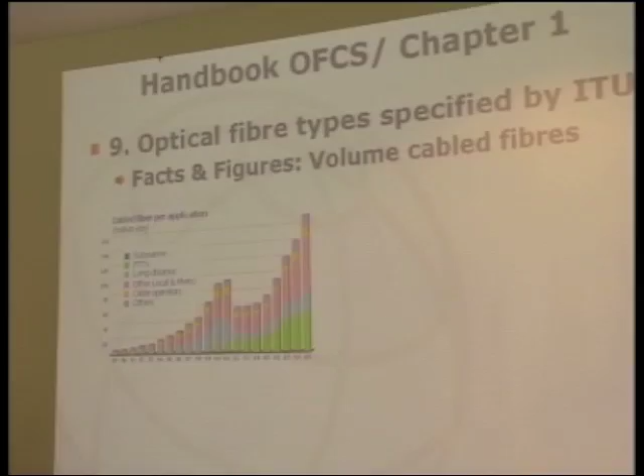You see also the different applications. Certainly important since 2001 is the growing impact of fiber to the home application, shown here as the green part. This section is growing very fast, particularly in Europe, America, and Asia. The long distance market is still about stable, while local, regional and metro is still growing, as you can see from this section.

Since optical fiber communication started, we have already installed more than 1.2 billion fiber kilometers. It's since the 19... I'm sorry. And we see also that the fiber to the home market is growing very, very rapidly. That's an important picture.

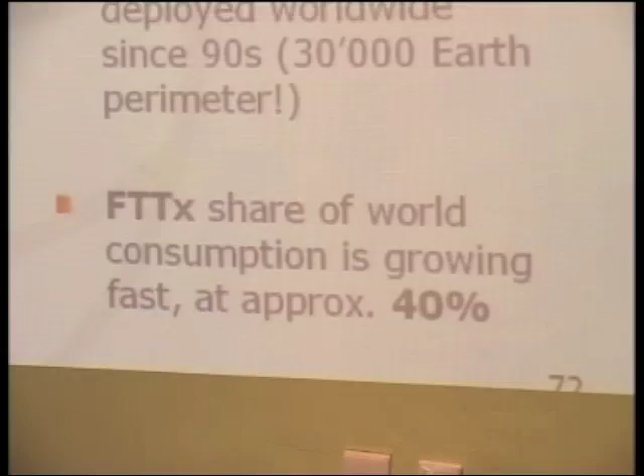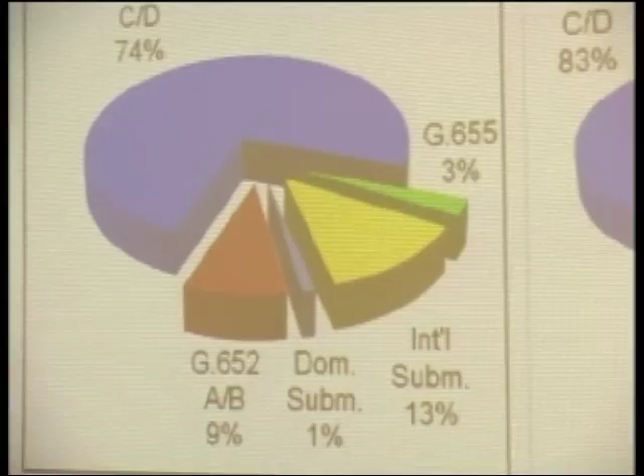Another picture that may be interesting for you concerns the choice of which kind of fibers. I show you here present data and foreseen data for 2015. You see that the G652 CD version is still the main installed fiber worldwide, with the AB fiber being the older type. The G655 fibers are a rather limited portion, because these are only for long distance, and you see that G652 fibers have been installed widely also for long distance applications. So again, it's not a black and white story about which fiber should be used for which application. It's clear that G655 will be used for long distance, that's clear.

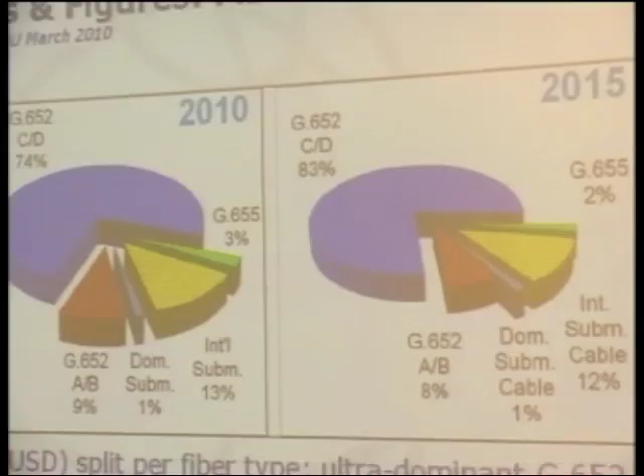With this picture, I hope to have given you an introduction into chapter 1 on optical fibers, and some clarifications of all the important parameters associated with optical fibers, and the different fiber types in our ITU catalog. I agree it's not an easy task to choose between the different fiber types available. It's a balancing act, not a black and white picture, and it certainly needs input from system manufacturers on what they think is the best optimization for a certain link.

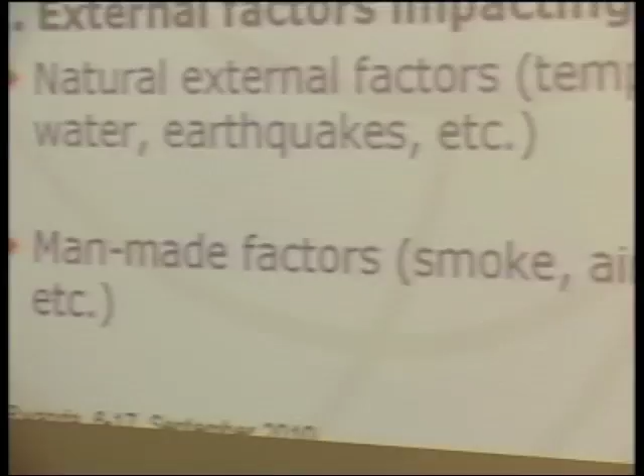We can also look at man-made factors impacting cables, like smoke, air pollution, fire, etc. In table 2.1 of your handbook, you see an overview of natural external factors impacting external and internal cables.

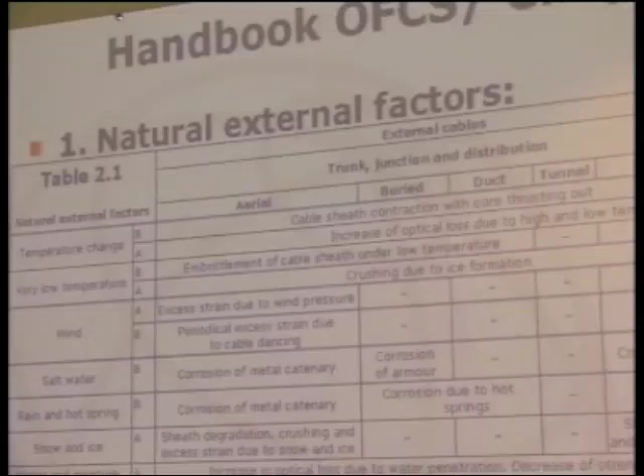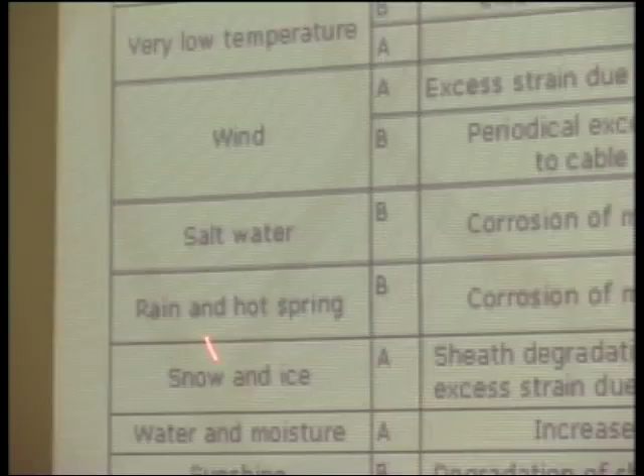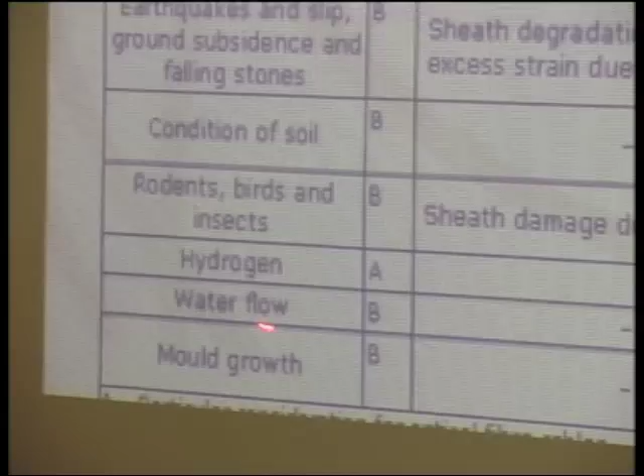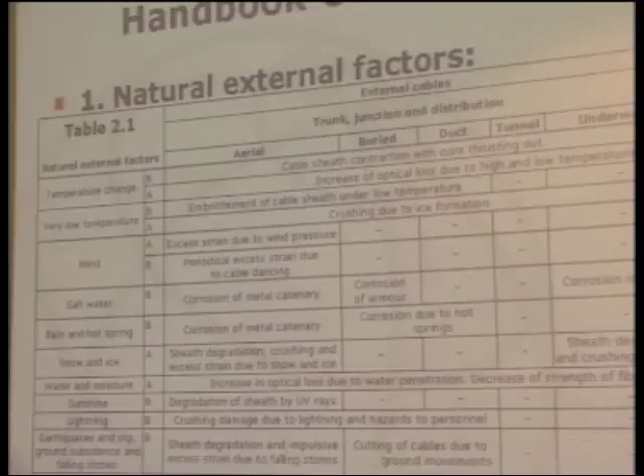This is a section of a series of different factors, some of which we'll highlight later. You see temperature change, very low temperatures for Nordic countries, wind, salt water, rain, hot spring, snow and ice, water and moisture, sunshine, lightning, earthquakes, soil conditioning, rodents, birds, insects, hydrogen, water flow, and mold growth. This is a list of typical impacts on a cable, with subcategories of aerial cables, buried cables, duct cables, tunnel cables, underwater cables, plus a separate category for internal cables—customer premises or central office cables.

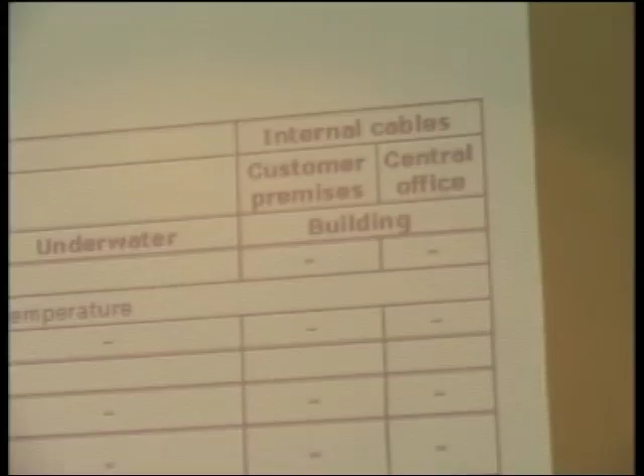I'm not going to highlight all the different aspects—you can see them in your book and look at what's possible. I'll just go over some of them.

For instance, temperature change could influence the cable sheath contraction and increase optical loss due to high and low temperatures. This is a clear aspect.

We can also look at earthquakes and ground subsidence. In that case, the sheath could be degraded, and impulse or excess strain could be added to the cable. So you see a whole variety of impacts that can act on the cable.

In table 2.2, we see a similar overview with the same structure of external and internal cables, but now showing man-made factors. For instance, factory smoke and air pollution, traffic, voltage that could connect to the cable, DC current, petroleum gas leakage, fire, even nuclear radiation, hydrogen, and installation practices. These are not natural causes, but man-made causes impacting the cable.

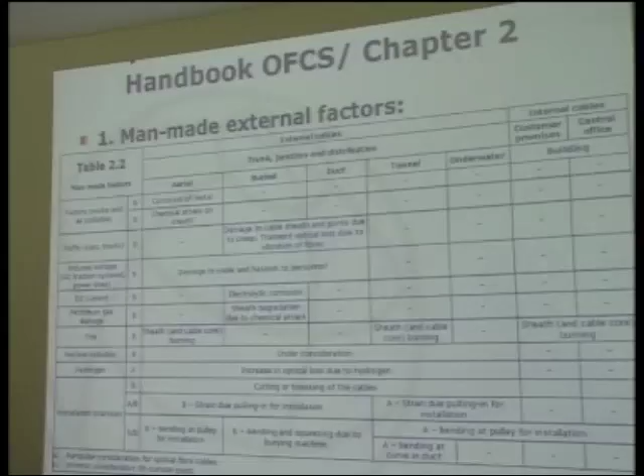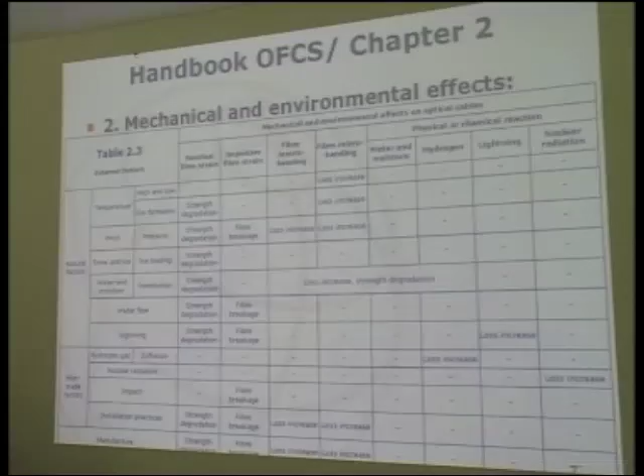In table 2.3, you see a more detailed overview of how these natural and man-made factors impact the fiber itself. For instance, some of these impacts work through residual fiber strain, which causes strength degradation of the fiber inside the cable. These effects in table 2.3 impact not only the cable but the fiber inside it—for example, temperature can influence microbending and cause a loss increase.

Let's look at others. For instance, if hydrogen is created in your cable, it can be seen as an increase of attenuation in the fiber. Also, issues like fiber strain impact fiber breakage. So this gives an overview of all the different causes which may act on the fiber and the cable, and you should take care of that.

Let's walk through them. First, residual fiber strain, caused by tension, torsion, or bending, may shorten the lifetime of the fiber because of increased crack growth.

In general, optical glass fibers behave elastically up to a few percent elongation before they break. The strength of the fiber is mainly governed by weak flaws already present from production level, which are always present to a certain percentage. Fiber stress weakens the strength, especially when combined with a moisture environment—moisture can cause weak flaws to grow and reduce fiber strength over time.

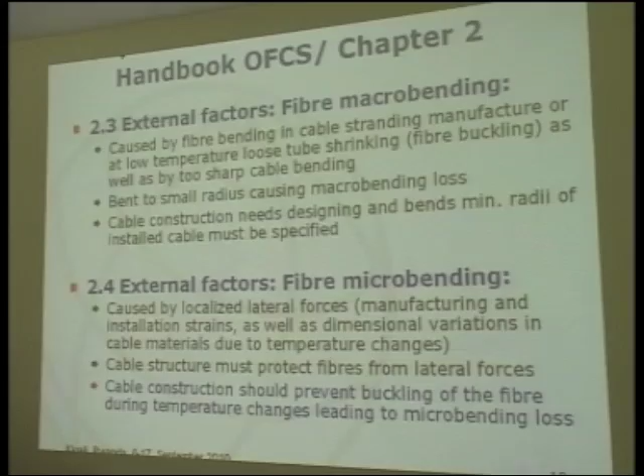If there are no questions so far, another external impact is water and moisture. Moisture may permeate through diffusion, and in case of inadequate cable construction or sheath damage, water may penetrate longitudinally within the cable core. So that is a damage which may happen.

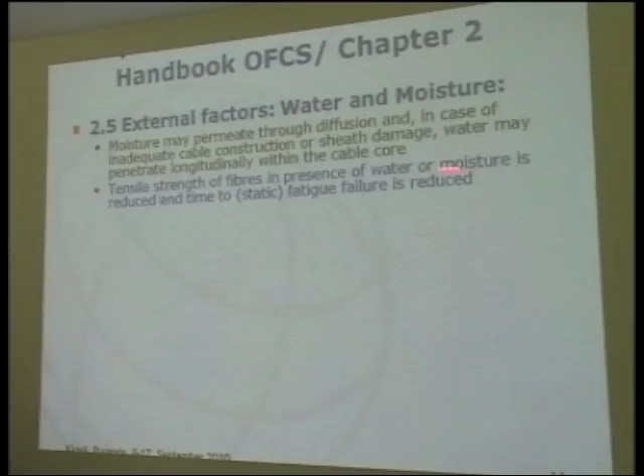If fibers are under tensile strength, and if they are in contact then with water or moisture, there's a very good chance that these weak flaws which are in the glass will weaken further and grow, and because of that, failure may happen at a certain time.

Now, optical loss may also increase with some cable constructions incorporating metallic elements if there is a generation of hydrogen when water is present in the cable construction. So hydrogen gas will introduce additional losses. We will have a look on that later.

Optical fiber should be isolated from water and moisture, particularly in the presence of excessive fiber strain, which is a conclusion from the above. Moisture permeation is minimized by longitudinal overlapped and bonded metal foil and the use of water blocking materials. This way, we can avoid water acting into the cable core where we have the fibers.

As an alternative, it's also possible to make a kind of metal tube with the fiber inside, which is a seamless metallic barrier that can be completely effective in preventing permeation. During production, a foil is formed around the fiber and welded over the entire length, giving a completely hermetic sealing of the fiber inside that metal tube. Of course, you have to take care that you don't have material inside that tube generating hydrogen, because that hydrogen is kept completely inside this metal tube. That should be avoided, of course.

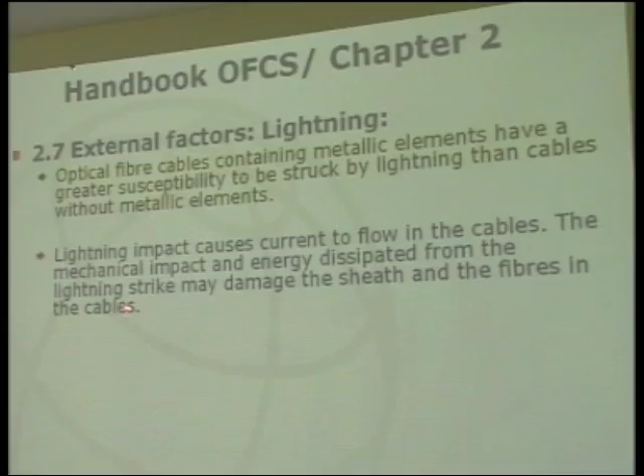Lightning impact causes a current to flow in the cables. The mechanical impact and the energy dissipated from the lightning strike may damage the sheath and also the fibers inside the cable. So there is a real danger in that case.

To prevent or minimize lightning damage, construction may be considered of non-metallic cables, because then the sensitivity of such a cable is lower. High current carrying sheaths are also a possibility to take care of this, or alternatively, some methods proposed in ITU recommendation K25. I have not looked into this recommendation, but you can look for it and download it from the website. So these are some issues around the possibility of lightning in your cable.

Nuclear radiation, that is maybe an issue which is not happening so often. Optical fiber cables may be exposed to nuclear radiation, causing optical loss increasing to an unacceptable level. We call this loss radiation-induced attenuation.

Normally, we see this effect in particular for cables inside nuclear environments, like nuclear power plants. If we have a cable inside a plant and radiation is present, that radiation may give a certain damage to the glass, because of which the attenuation of the glass will increase.

Considerations on the cable are still under study, so we will not see this effect so often in normal applications. For those applications where cables are necessary in a nuclear environment, such as nuclear power plants, special fibers have been developed and are available. These fibers are not specified in ITU, but several fiber makers make them available.

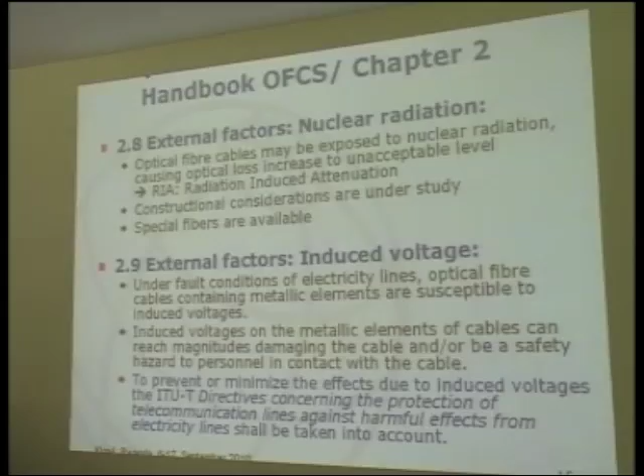To prevent or minimize the effect due to induced voltages, there is a directive from ITU concerning the protection of telecommunication lines against harmful effects from electricity lines, and that should be taken into account.

Another external factor could be biological attacks on the cable. The outside of a cable can be damaged from biological attacks, for instance by mammals, squirrels, mice, rats, moles, and other rodents. I think that is well known. Also birds like the woodpecker, cockatoos, insects like termites, ants, beetles, wasps, and also microorganisms like bacteria, fungus, and molds could attack the cable sheaths.

When it is not possible to avoid the optical cable being exposed, one could eliminate this hindrance using chemicals or poisons. However, we should be careful that in this case, these chemicals and poisons are useful sometimes, but they can be a danger for human beings and also cause environmental pollution. So there is a certain limitation in using this kind of countermeasure.

Some chemicals are useful as a deterrent, to get rid of the attacker, not as a poison, but just to frighten them off. Some chemicals are sprayed on the cable structure, on the surface, and they leave a special smell as a deterrent.

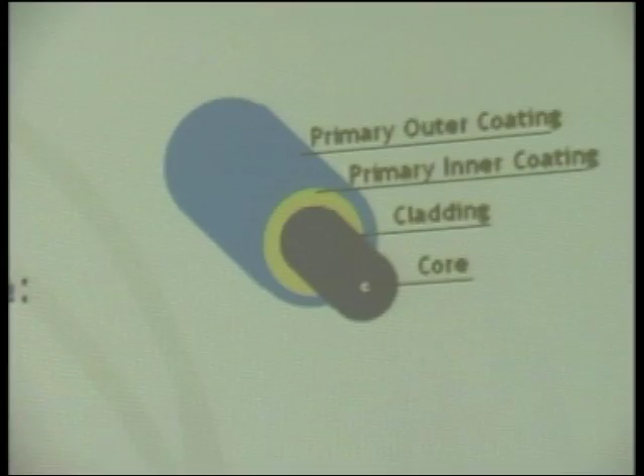Now the optical fiber itself—we have seen already the base form of a fiber is a primary coated optical fiber. I've indicated here the cladding in dark blue, and here the core inside, the single mode core. Then you see two layers around the glass: a primary inner layer coating and a primary outer layer. So in fiber production we add two layers of coating, indicated as inner and outer layer.

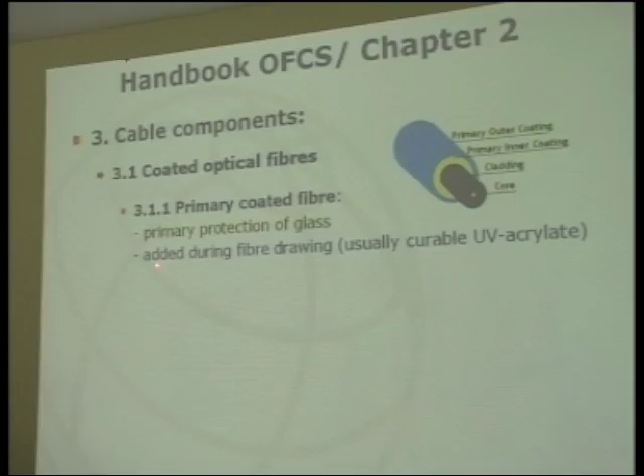First of all, the goal of a primary coated fiber is to provide protection to the glass—that is the main importance of a coating. It's added during fiber drawing, as I explained yesterday. Usually it is a curable UV acrylate. In some cases we can also use other materials, for instance if high temperature coatings are needed, but normally for telecommunication use, UV acrylates are used as coating material.

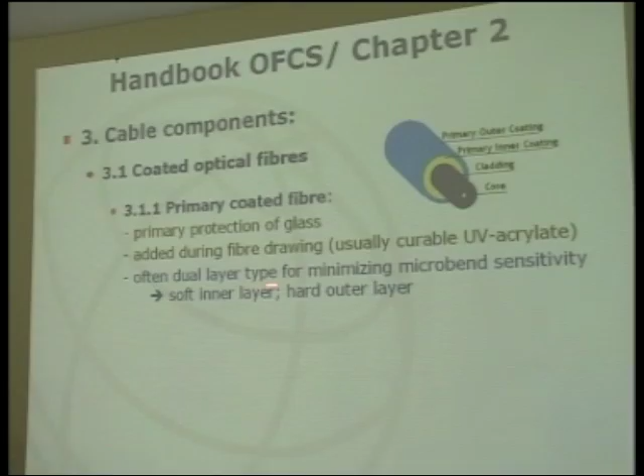As I explained yesterday, we often use dual layer types to minimize microbending sensitivity, which means in general that we have a soft inner layer directly in contact with the glass of the fiber, and a hard outer layer to protect the whole assembly from the cruel outside world, so to say.

It's specified for a certain temperature, usually at least minus 60 degrees up to plus 85 degrees. But as I explained, special coatings are available if we have to apply this fiber to another temperature region—for instance, high temperature coatings are available up to 200 or even 300 degrees for very special applications.

In general, the requirement is that the coating should be easily removable. So when we make splices, we have to be able to get rid of this short piece of coating—stripping is important.

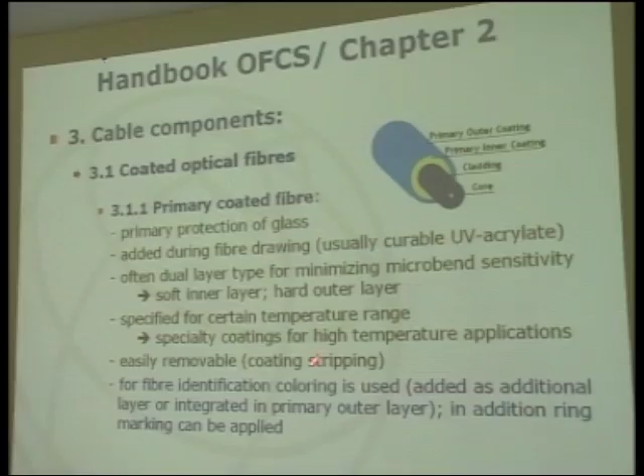Often for fiber identification, if you have multiple fibers inside a loose tube, you have to recognize these fibers, so a coloring scheme is used. This can be added as an additional layer after fiber drawing, or in some cases integrated in the primary outer layer, a feature we use in my factory. In addition, we can use the same color by adding multiple ring markings on it.

We can add a kind of ring marking on the color layer—1 ring, 2 rings, or 3 rings—and then use the same color, red, three times inside the same tube for recognition purposes. So this is another possibility to increase the recognition of the fiber.

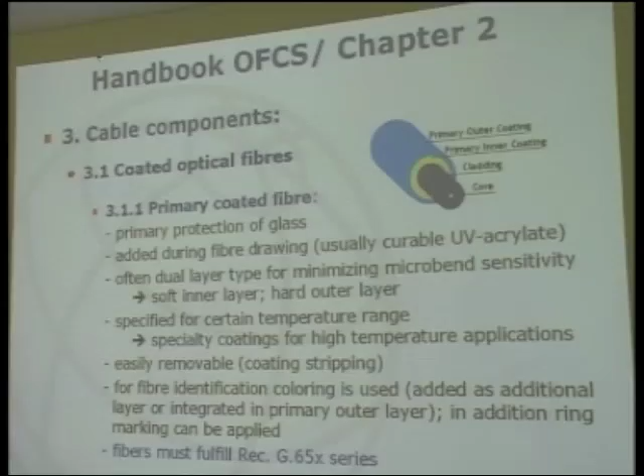And of course, all these fibers have to fulfill one of the G.65x recommendations.

Now, secondary coated fibers can be in different forms. We can have them in the form of a loose packaging within a tube or a groove—I'll explain that later. We can also have that in a kind of micro-module construction, or in a tight jacket coating. And a special form of that is also a ribbon construction.

First example is a loose tube. Here you see a plastic material formed into a tube, with the fibers inside—here you have the primary coated fibers. Inside the tube we usually have a filling compound, a gel, but there are also cable constructions without the gel.

Another example of a loose construction is what we call a slotted core construction. You have here a plastic form with a kind of grooves, and in these grooves the fiber can be laid down during the making of the cable.

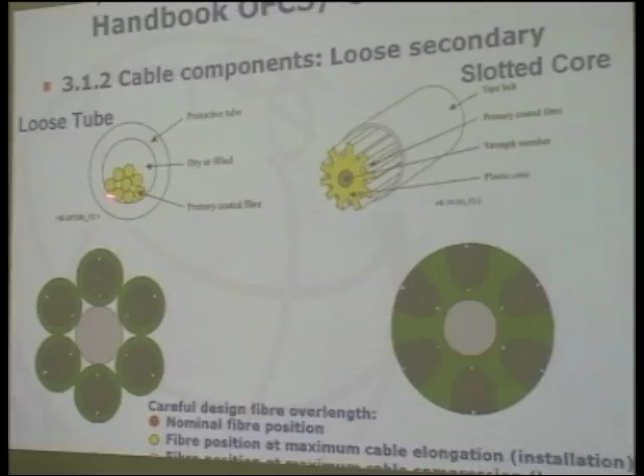Special care should be taken by the cabler: if you have fibers inside this construction, either loose tube or slotted core, there should be a certain overlength of the fiber inside the tube. This is because if you later strand those tubes along a strength member, the multiple tubes surrounding the cable form a kind of helical formation. The fiber should be at nominal length in the middle of this tube.

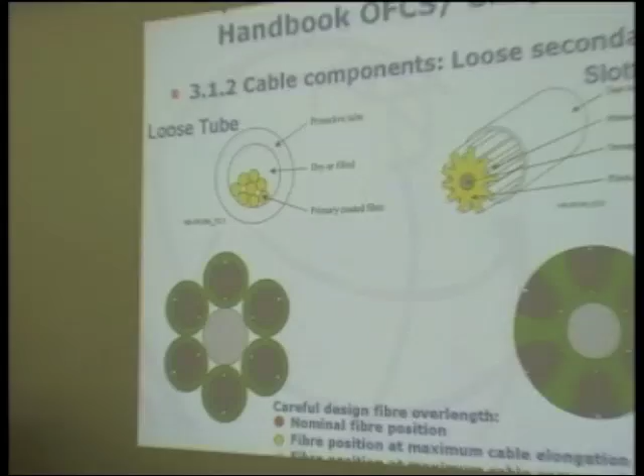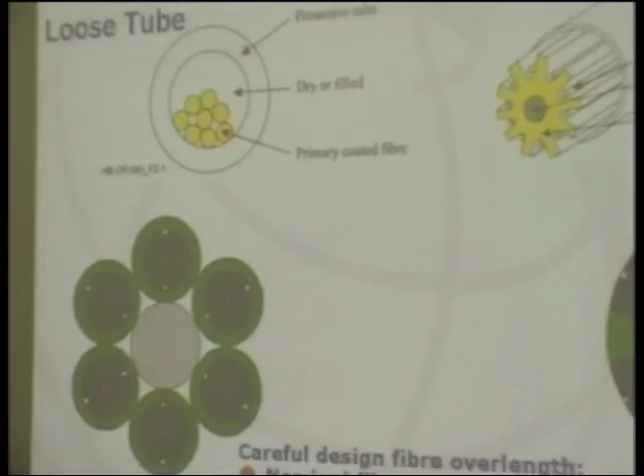The cable design should be such that if the cable is installed and elongated, the fiber will move to the inside of the tube, since the whole cable is elongated under certain conditions. In that case, the fiber should be free to move from the center position toward the outer dimension, but the cable should be designed so that beyond this point no additional strength or strain acts on the fiber. So this is a cable design factor.

On the other hand, if an installed cable is used at low temperatures, the whole construction will shrink, and the fiber will move to the outer part of the tube. That also needs to be a design criterion, so this is not an overreaction and the fiber doesn't start buckling inside the tube. I mentioned that already as one of the factors that could increase attenuation: low temperatures causing fiber buckling in a tube. So this is also a criterion for the cable maker when designing the tube and the overlength of the fiber, taking care of the final cable construction.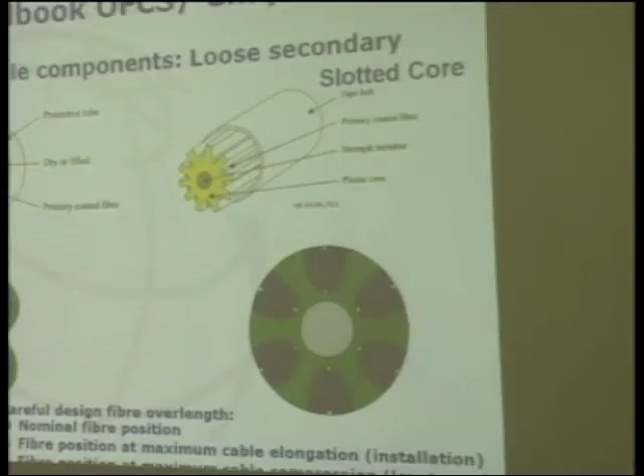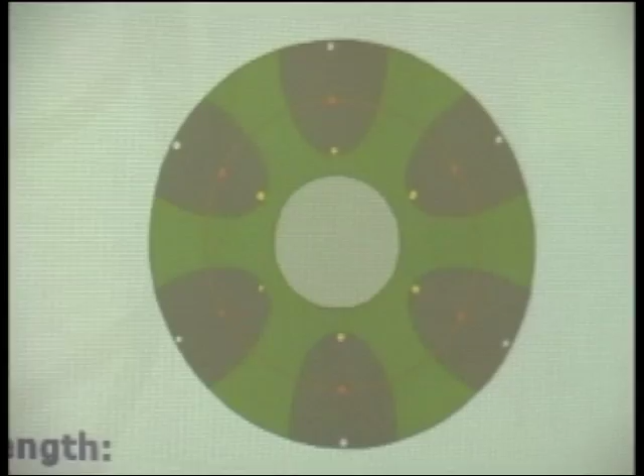The same happens for fibers in a slotted core. Normally the fiber should be in the middle position. At installation, when the cable can be elongated, the fiber should, at maximum, reach the wall of the tube, but not more than that—it should not build up strain in that position. At low temperature, when the whole construction shrinks, the fiber will move toward the outside region, but not further than indicated, because otherwise macro- and possibly micro-bending effects start up. So again, this is a design criterion for the cabler.

Is this clear for you, that there are constraints and issues around the cable design to have it worked out well? So this is certainly the responsibility of a cabler.

Question: suppose there is high humidity and some water between the tubes—what is the effect of that humidity if you have it in between two tubes? Answer: in general, water will not go further into the tube. If there is any leakage because of damage, maybe water comes into the tube, but generally the tubes are filled with a kind of gel, which also protects against water and humidity going further into the cable.

There was another question: I didn't quite understand the different positions of the fiber inside the tube. It seems these positions depend on the environment and the situation you're in. Does that mean the tube is empty? Is there anything around the fiber that maintains it in a certain position, or is the fiber free to move into different positions?

A very special form of tight contact is the ribbon cable. Here you see that a couple of fibers are placed next to each other, and there is a coating matrix around that, which is the secondary coating material. You see it is in direct contact with the primary coating of the fibers.

You can take off the coating material, the matrix material. You can cut the fibers and cleave them in one handling action, so all the fiber ends are at the same position, and then splice two of those elements to each other. This means you can splice in one run 4, 8, or 12 of these fibers, depending on how the ribbon is built up. So the main purpose is to improve the speed of installation. That is the background for why this kind of ribbon construction has been developed.

Of course, you need different splice machinery for this kind of application compared to single fiber splicing, which is done for loose tube applications.

A special form shown here is called encapsulated ribbon, in which the coating material completely surrounds all those individual fibers. There are also ribbons called edge bonding, where there is additional coating material in between the fibers, not surrounding the whole structure, like here. The most often used construction of ribbon is the encapsulated structure.

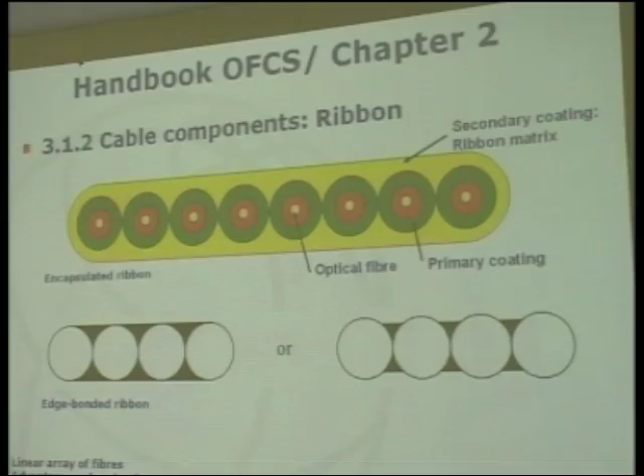Typical developments of this construction are, for instance, in Asia, Japan, where a lot of ribbon cables have been developed. In the United States, you see often this kind of development. In Europe it is a bit limited. Some countries have chosen this solution; for instance, Sweden is using quite a lot of ribbon constructions, while most of the other European countries have decided to go for loose tube cables. Any questions on this particular construction?

Okay, then we move to the cable core, which is described in section 3.2 of your handbook. The core of an optical fiber cable is usually formed by using one or more optical fiber units. The number of fibers in the cable and the type of application will determine what kind of optical fiber unit structure is selected. It's also important to take cable installation and fiber jointing into consideration when discussing this.